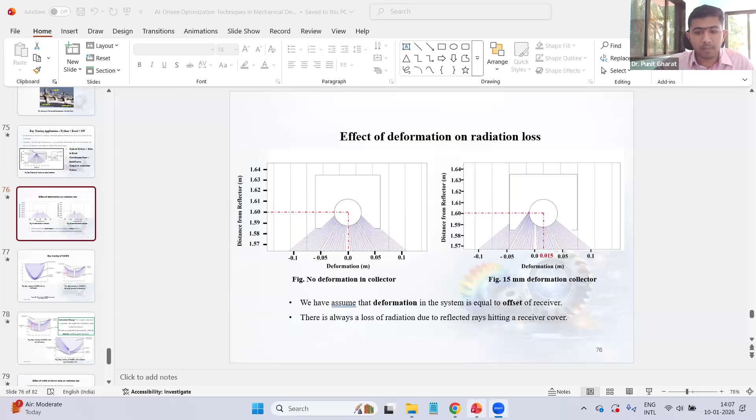Is my screen visible? Yes, sir, visible, but we have to do presentation mode, sir. Yes, sir. Yeah, sure. What is going? Yeah. Now? Perfect, sir. Thank you. Yeah. Just a minute.

Good afternoon, everyone, and welcome to the AICTE ATAL Online 6-Day Faculty Development Program. So I'm going to present on AI-driven optimization techniques in mechanical design.

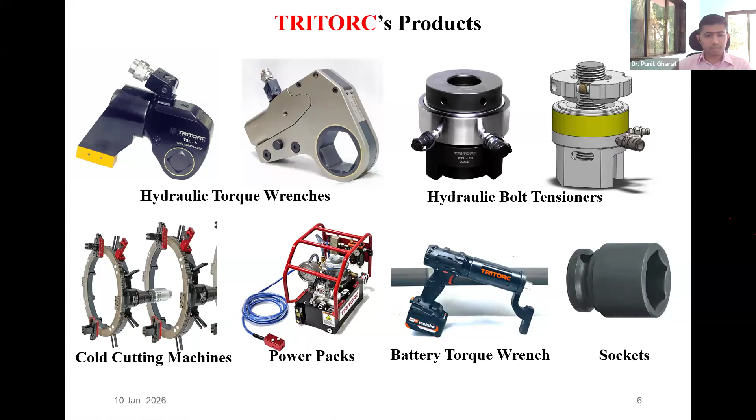So today's agenda will be about the traditional mechanical design processes, how AI currently works for generating CAD from just text. We need to give the prompt and it will automatically generate the CAD model. For that, our prompt must be perfect, because according to our input, it will generate the CAD.

Then we'll see the AI plus CAD tool integration, like SolidWorks plus MecAgent, and there are several tools coming now in the market. Those are not free, but yeah, we'll discuss it.

Then introduction to AI/ML. Though AI is a big body, we'll see the machine learning types and how I used ML in my research project in my PhD.

As we know, the traditional design process starts with requirement collection. Then we do some hand calculations using analytical formulas, whether it is Lewis's equation for the gears or power equals 2 pi N T by 60. That is analytical formulas we've known for years.

Hello. Hello, yes sir, any issue? Somebody said hello, that's why I stopped. Okay, no sir, continue sir.

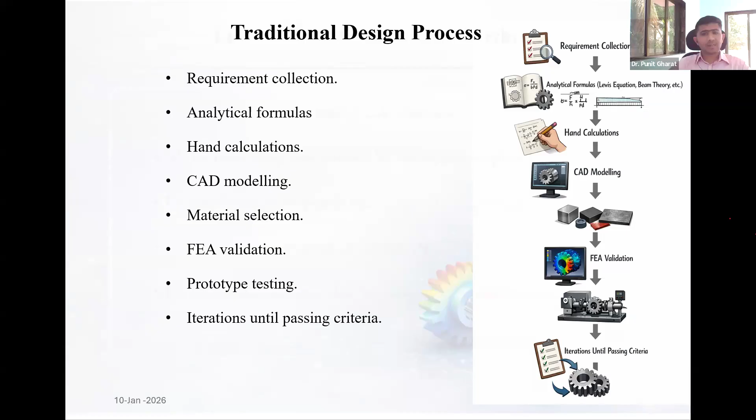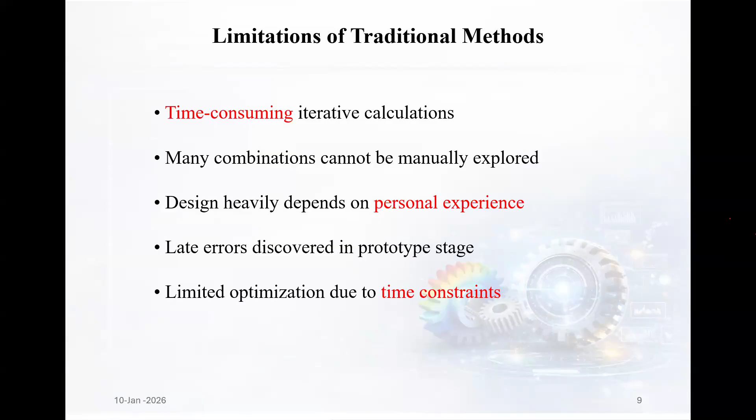So this is the traditional process. Obviously it has some limitations. I intentionally highlighted with red marks, like it is time consuming, and it is based on personal experience. Like if I have 10 years of experience, I can do that in 10 minutes.

But what about the freshers? We need to teach a fresher till they get some idea about it. So with a human mind, we can have only limited combinations for that time. Again, there may be human errors and limitations due to the time constraint.

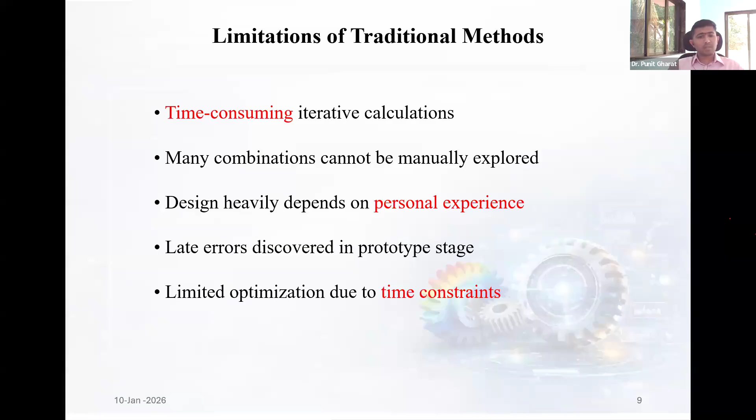In industry, we normally don't get more time, unlike in research where we may have 5 years for one product. In industry, you need results in 1 month. So I'll give you my example, what I've done in my PhD.

So, from traditional design to parametric optimization. You can see the parabolic trough collector. Normally it is made up of a metal structure on which mirror strips are attached.

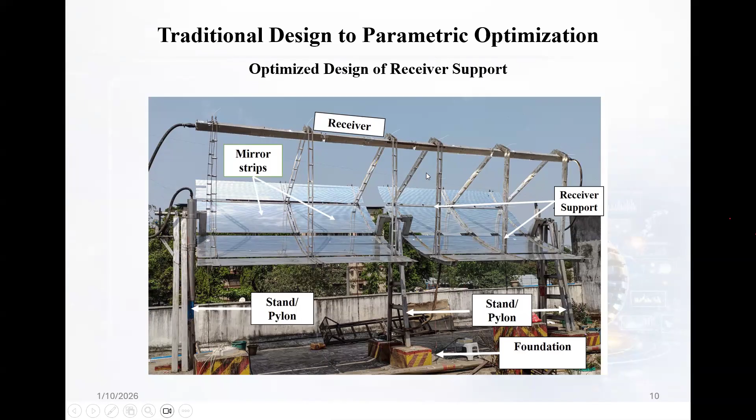Okay, I'll just continue. So whatever incoming solar radiation is incident on the mirror strip gets reflected back and concentrated at the receiver. So whatever is flowing through the receiver, like oil or any liquid, gets heated, and then we can convert it into any other form of energy.

So this was my project. As you can see, it is made up of a whole metal structure, and even the metal structure itself weighs 300 plus kg. Later, we found we can optimize each product, each component.

For this example, I have taken a receiver support. So we searched various literature and found there can be three best possible receiver arrangements. A was the earlier one, B we got from our literature survey, and also C from the literature survey.

But from further analysis, we came to know that B can be the best, as it is at center, so there's no need for two places for fixtures.

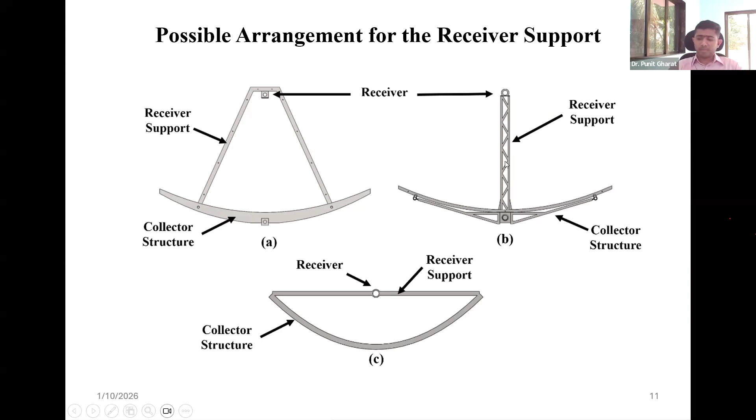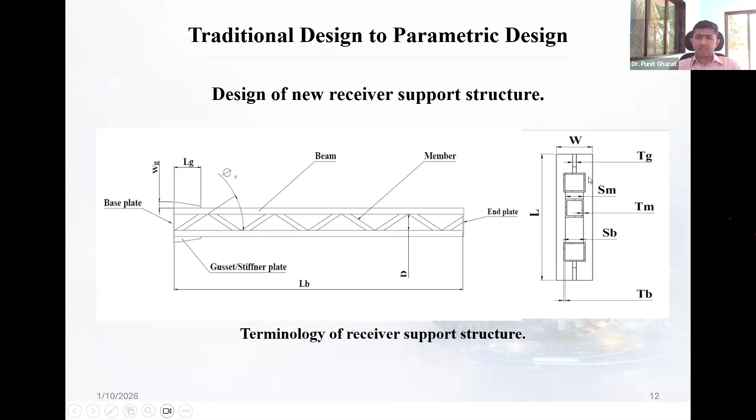So we took this B with a deep study, and then for optimizing that structure, we made some initial sketches with various terminology, like what will be the length, what will be the distance, what is the member size, member thickness, and also searched the market for what kind of members are available.

This is a basic design for every component. Like we normally do the CAD, then in FEA, first step is meshing, then we get results like deformation analysis, stress analysis, and then FOS, and several others depending on your requirement. So it is a basic methodology.

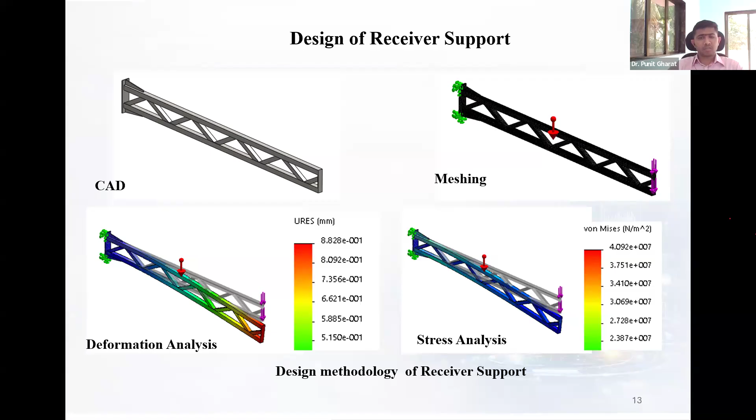There are several beams and members available in the market, like circular pipe, square pipe, L angle, and even C channels. But I have considered around three basic sizes for my analysis.

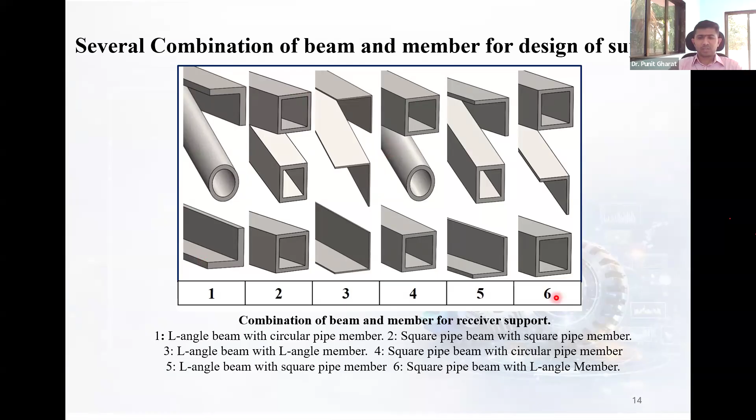We made 6 combinations, and accordingly we got around 812 possible designs. We have beam outer dimensions of 30, 25, 20, because we don't need a smaller one, as it will deflect more, and a larger one will increase the weight. Then there are beam thicknesses like 1.5 to 2.5, 3 mm.

Then there are some assumptions, like if you wanted to do welding, you can't take 1 mm, because in normal welding a 1 mm sheet is not sustainable. Then square pipe, circular pipe, and various others. So we got around 812 designs only for one component, and making that CAD model of 812 models, running the FEA and generating the data is itself a tedious job.

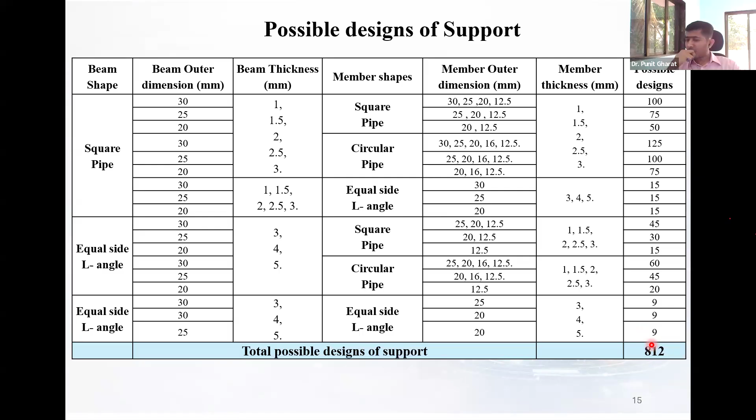So it will take more time. So what we did, we went for parametric analysis. It is a part you can do in SolidWorks simulations. So we gave the beam thickness right from 1 to 3 mm, member thickness 1 to 3 mm, and we generated around 25 scenarios in one analysis. So instead of 812, I hardly did 30 to 35 analyses.

The result came in the form of Excel. Then we analyzed that data, did some multi-criteria decision making, and then finally chose some thickness. And our new design was like that.

In the center, you will get the receiver support. The entire structure is not changed, though you can see the earlier design was different. So for every component, we have done the optimization. Here I am showing just the receiver support as an example.

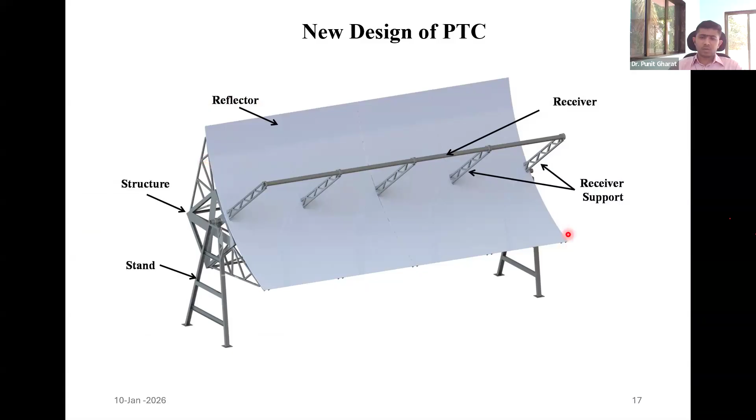So what was the outcome of the analysis? Whether you are using AI or ML, there must be some output. By parametric optimization, what we got was the older design was 17 kg and the newer one was 6.6 kg. So almost 67% reduction in mass. Reduction in mass means reduction in cost.

Then reduction in torque, which was the main factor for my project, because reduction in torque is directly proportional to the tracking system, and it directly affects the gear and the motor required for the tracking of the solar collectors. Overall, the reduction in structural mass was around 16%. So it was an achievement. Instead of 812, I did only 30 to 35 analyses.

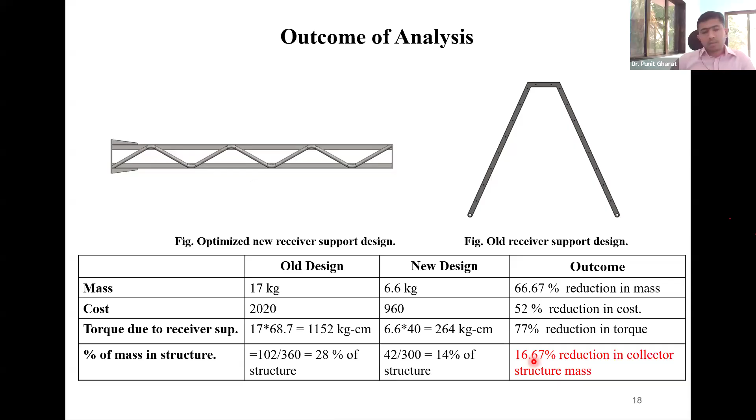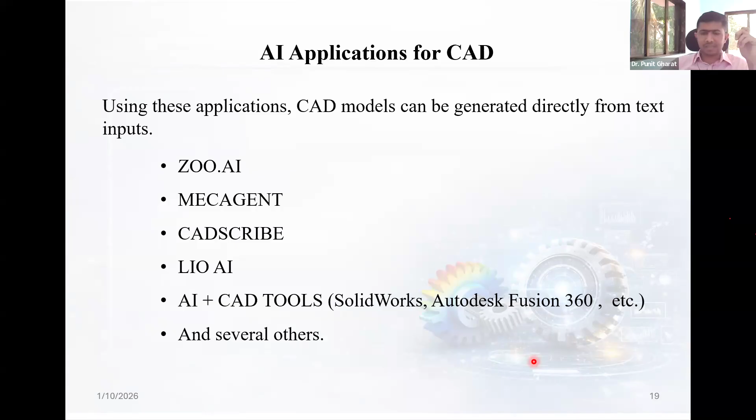So that's what the traditional and AI-based approach is all about. Now we will move towards how AI applications are available in the market for generating CAD or 3D models easily with just a prompt. There are several, like Zoo, MecAgent, CAD Scribe, LIO AI, and we can integrate it with SolidWorks, Autodesk Fusion, or others like Siemens NX.

So here is one example for text to CAD. There is one application called Zoo. You can download it, and it is available for free for some prompts or credits only. So I generated one metal block. You need to give a proper prompt, like: make a metal block of dimension 300 by 200 by 2 mm thickness, all four corners filleted 20 mm, four corners having four holes of 30 mm diameter at a distance.

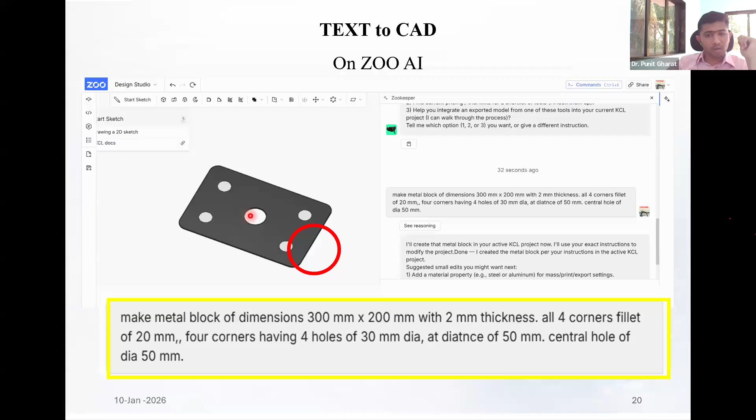Sorry, even my spelling was wrong. It considered a central hole of 50 mm. So you can see the four holes at the corners, the 2 mm plate, and the central hole. Then I wanted to change the thickness, so I gave another prompt: please revise the thickness to 20 mm. Automatically it changed the thickness, though it takes around 2 to 3 minutes.

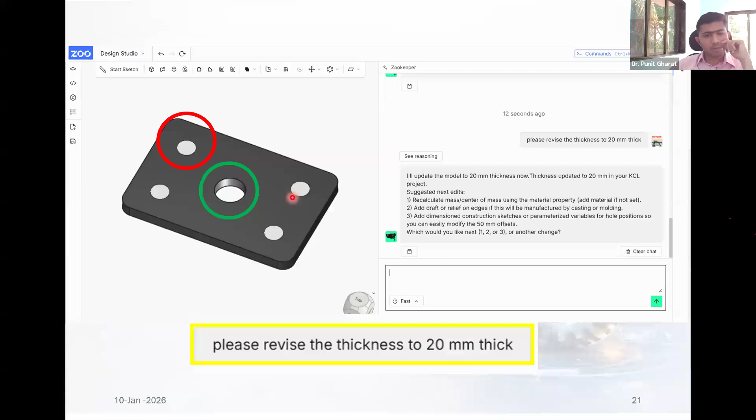It all depends on your internet connection and how complex your geometry is. Here you can see in red, the hole is not properly drilled, it is not through all. So what I did was give another prompt, like: require all four corner holes through all. So here you can see I got whatever I wanted, like a plate with four holes at the corners and one central hole.

This is how you can generate a CAD model without having an expensive CAD application like SolidWorks. In the market, you will get it at 5 lakhs for commercial use, and for institutes it is affordable, or they give a discount, but for industry they don't. So this was the first example.

Are you enjoying or just bored after lunch? You can give me feedback. Yeah, yes, we are enjoying.

So next, I created a spur gear. Like I said, in my product line, we are working on the battery torque range, and one of the important assemblies is the planetary gearbox, where multiple gears are required, and in that we have changed some profile. So I gave the prompt: create a gear with 17 number of teeth, module 1.25.

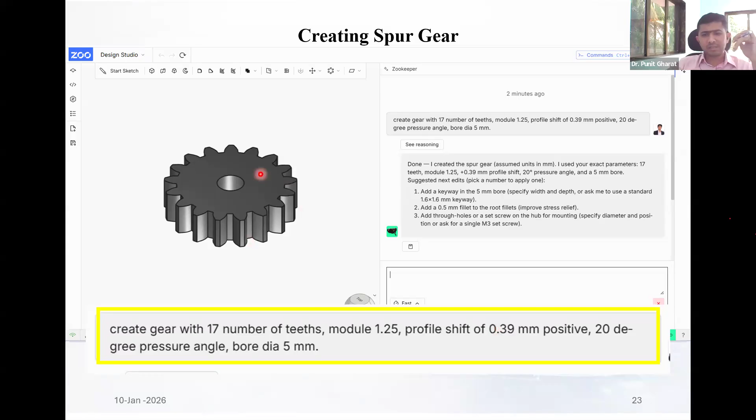Even in the next prompt, I asked for the exact dimensions of all the parameters. Like module is already given, teeth are already given, but what is the PCD? What is the addendum, dedendum? What is the outside diameter, which is very useful while manufacturing.

Making the CAD is easy, but the part must be manufactured easily, otherwise it creates issues from the manufacturing point of view. Then root diameter, bore diameter, which was already given. So this is how we can generate a gear.

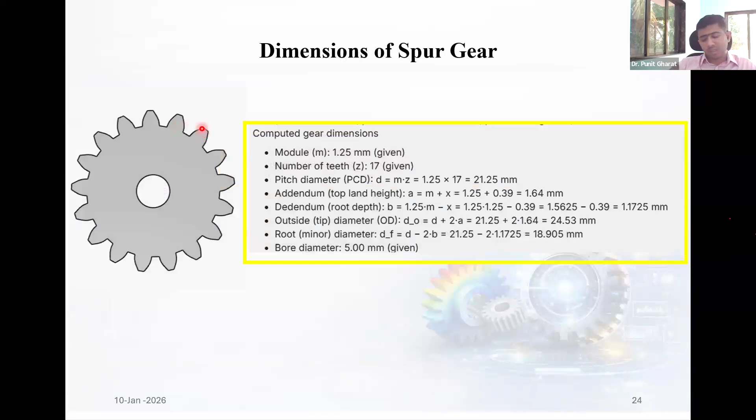There was also another online site available called CAD Scribe. I gave the same prompt there, and you can see the different geometry - how the root was here totally straight, and here quite deep. So I imported the step file and checked it with our existing model.

We had one gear with the same specification, and we had a sketch of it. We merged both, and almost 85 to 90% of the gear was matching right from the profile. This means we don't actually need expensive software for it.

Though for gears, you can also use KISSsoft software, which is 5 to 8 lakhs for commercial use according to the package, but from that we get the exact profile.

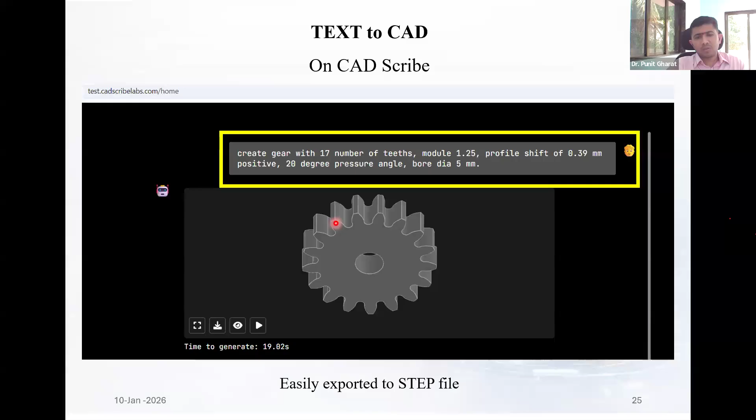Initially, with any AI, we need to work a little bit hard to generate the data or train the AI model. Even using ChatGPT on a fresh computer or fresh login is very different from continuous use, because it has history, and according to that history it makes your next output to your prompt.

So we'll move next to CAD plus AI integration. Earlier we saw text to CAD, but as we use various CAD applications like CATIA, NX and SolidWorks, there is integration available.

Many of you have used SolidWorks plus ANSYS plugin. So the SolidWorks model is directly imported into ANSYS easily without generating a step file separately. So right now, various AI integrations are available in the market which can be integrated into CAD applications easily.

So again, it learns from the previous designs. You need to generate data for any AI or ML applications. Then it helps to optimize the geometry, and it predicts the stresses, weight, performance, and all within a short time. You don't need to...

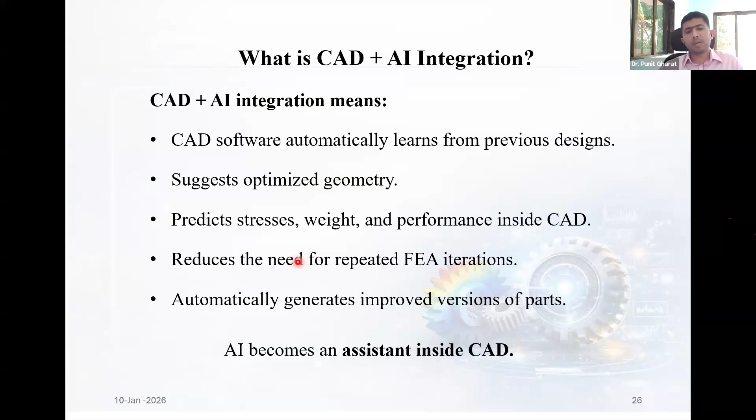So there are several CAD plus AI features available, like Autodesk Fusion plus, SolidWorks plus AI-based design assistance, Siemens NX, PTC Pro - there will be more. If you find some, you can also inform me. Actually, it is evolving now, so day by day new things are coming.

So next we'll see how SolidWorks or any CAD application and AI integration is happening now. There is one tool called MecAgent. You can search it on Google also, and on YouTube hardly 2 to 3 videos are available.

From one of those videos, I have taken a screenshot and I am presenting it because it's completely new in the market and not easily free. It is like Copilot for designers. You need to give the prompt here, and automatically it gets imported in SolidWorks. There was one example, the designing of a scooter, where we wanted to make one fork.

You can see the motor shaft and the wheel shaft. For joining this, we need a fork. So how to make it?

So obviously, what I'll do, you will measure a center distance in SolidWorks. Then you will apply your creative mind, design thinking. You will ask your friends or your teammates.

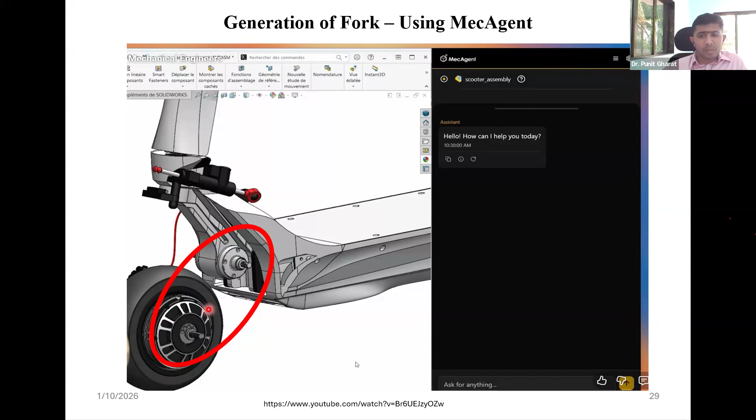So there will be multiple options, but it will be time consuming. So in AI, you just need to give a prompt: generate a fork that connects the wheel to the scooter. And within a minute, it will give the available options.

So price is picked from the market. Even sometimes it gives the reference of the site from which it is referred.

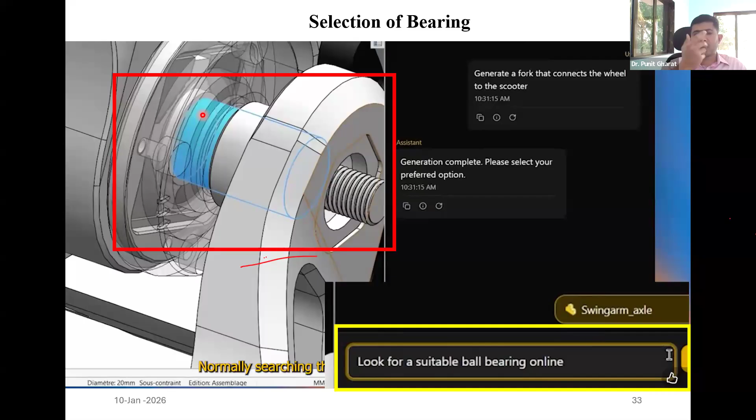Then the next stage was to look for the suitable ball bearing online. So just click the shaft. It will automatically take the inputs like shaft diameter 12mm, and accordingly it will search for the ball bearing and give online parts like from SKF, Schaeffler, or SKF.

In while bearing selection, we need to go to the SKF site, then the product, then the needle bearing or ball bearing or any type of bearing. Then we need to apply filters like what is the ID, what is the OD, which kind of bearing do you need. It will be tedious work.

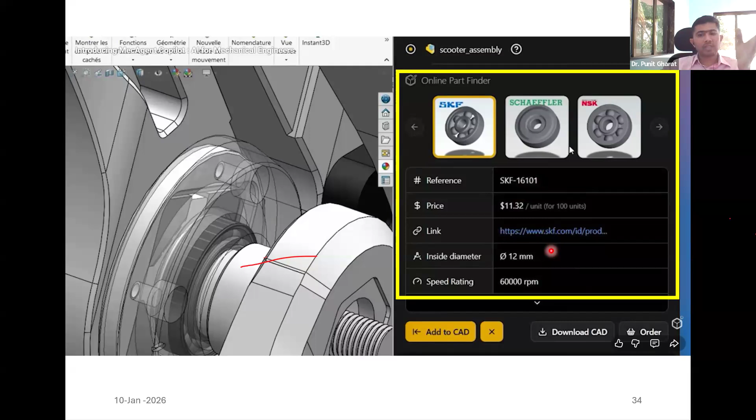Then he made some changes in the wheel. So the prompt was find me a big scooter wheel with 2 grooves on it, meaning it is already marked - earlier the wheel was smooth, so added 2 grooves. Later he wanted to add some zigzag groove.

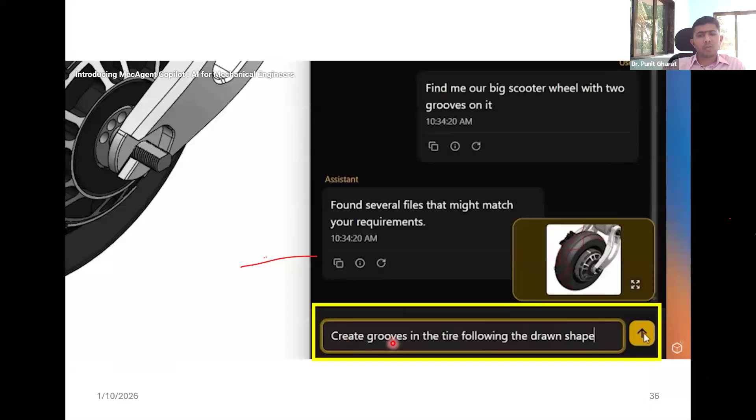So the next prompt was like create a groove in the tire following the drawn shape. Drawn shape means you need to draw this zigzag pattern. Like we can add any zigzag pattern, and AI will absorb that pattern and create the groove accordingly. It means AI is very smart nowadays.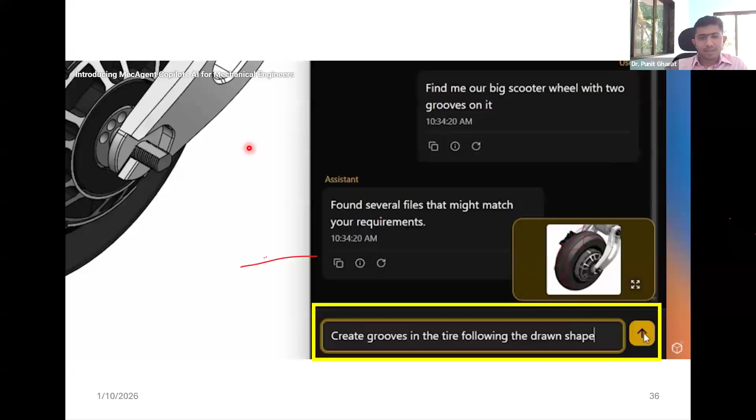So next, within a minute, you will get this. You can see the preview, how it is acting. And after that you can do add to CAD and you will get the entire tire.

So in MecAgent, from those 4 to 5 slides, we generated the fork, then grooves on the wheel, selected the bearing. This is how we can do various things within a short time without much more headache.

So MecAgent is new nowadays. You can go on the MecAgent site, and I'll strongly recommend going on YouTube and seeing the video, because nowadays AI is evolving and various new things are coming.

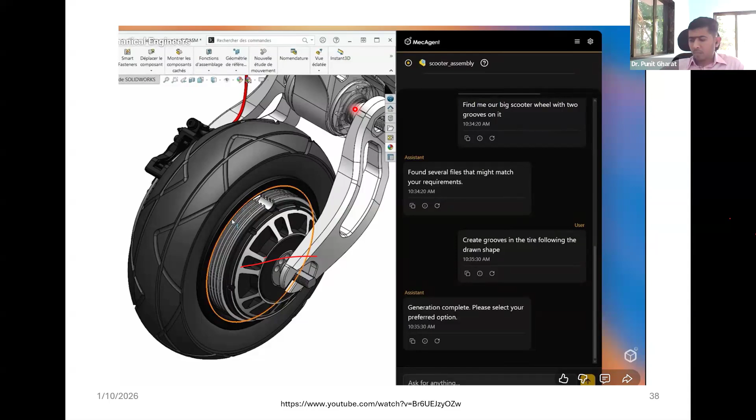So yeah, the benefit will obviously be, as I said, a huge reduction in the design iteration time. And manual mode is very tedious, as we know it's all dependent on your expertise - a fresher will take more time than an expert person.

And also at industry level, this difficulty happens when some experienced person leaves your company, because that experience goes with him, and you don't have anything with you. So you just hire new people and then again training. Instead of training the person, train the ML model that will stay with you forever.

So yeah, it is data driven, which is actually good, and traditional is designer dependent. In traditional, obviously slow iteration, and AI integrated will be fast.

So we have seen the AI for CAD, which is only for 3D modeling and all. Next we'll see how actual AI/ML works for design. In CAD, it's mainly for improving the model or making drafting efficient—faster, automatic feature recognition, reduces modeling tasks, faster concept modeling.

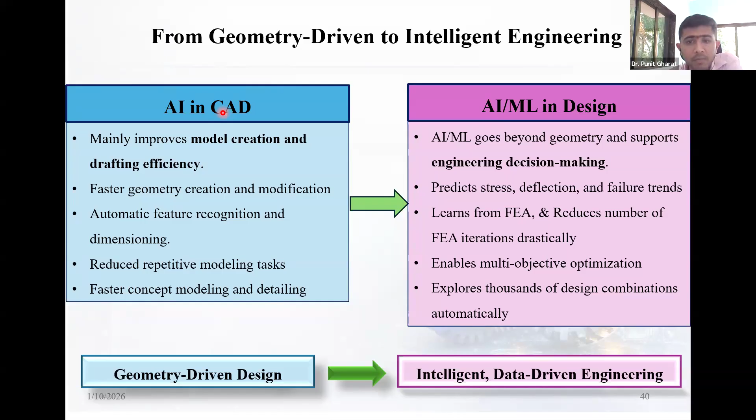So there is one question: do companies really use ML in mechanical design? For MSMEs it's at a very low area, and MNCs are using it nowadays because AI is coming. So not everywhere and not for everything—it is used where many iterations are required, meaning where more time is involved, tedious work, regular work.

When your FEA is very slow, like when making a gear, every time you need to do the Lewis form factor calculations, then bending stress calculations, then selection of width. Instead of that, you can directly use an ML model, and after that just put the value—which model, which number, how many teeth—and you get the desired results.

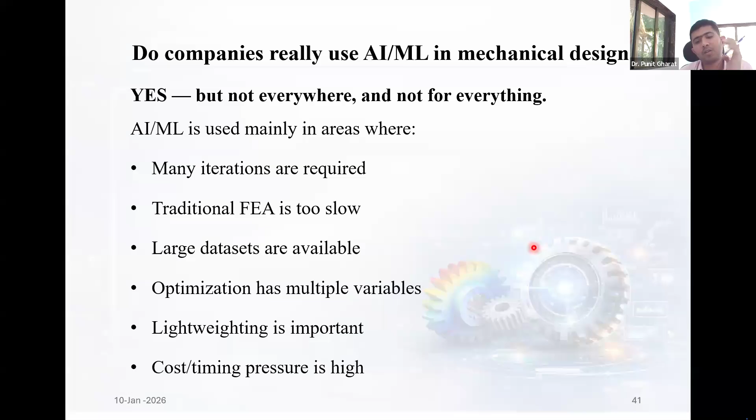Then in AI/ML we have multiple variables available for optimization. AI/ML is very good where price and cost, price and time, is important.

So how does AI transform mechanical design? It automates repetitive calculations, so you don't need to make the same calculation again and again—just put the value and you get the answer. It learns the relationship between parameters. Manually we do extrapolation and interpolation, but here it works on the relationship between parameters, like P directly proportional to T or N, 2 pi T by 60, and so on. This is how it works at the back.

It can predict stresses, deformation, or efficiency easily. For stresses in FEA, like I said earlier, we need to wait to finish the entire FEA—many times your machine fails and half the day is wasted. So once you feed the data into the ML model, it becomes the base for your future work.

It reduces the number of prototypes. In my gearbox design, we made around 3 to 4 prototypes till the final one. In industry, it takes a very long time to make prototypes—around 40 days for one prototype, and design time is different, so around 6 months already pass. So you can actually use this to help.

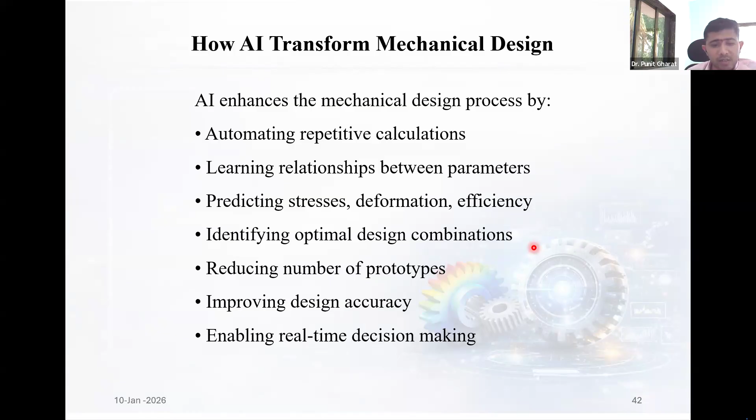It improves your design accuracy and real-time decision making—you don't need to wait. So currently there are many companies, like I said, MNCs or bigger companies like BMW, Audi, and they are using it. Everyone is using it for optimization.

I intentionally marked optimization in red because every company nowadays, whether aerospace, automotive, or manufacturing, is going for optimization—obviously to reduce time and cost, because a company runs on money and is always looking for the highest ROI. For that, you need to make a product at a lower cost.

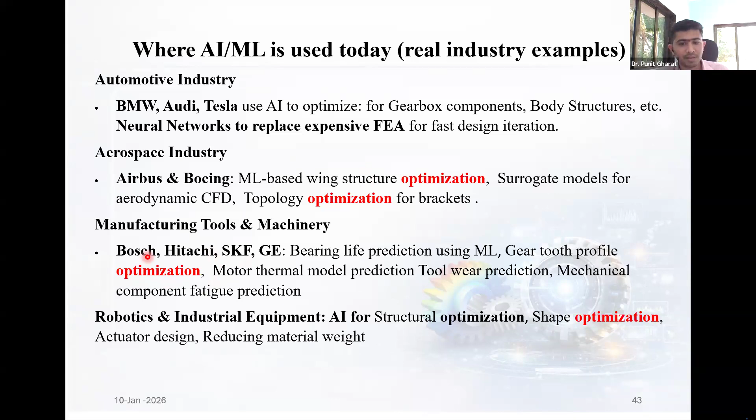Then components—not every component can be easily fed into AI. Simple symmetric components can easily be added; you can add complex components too, but not all. So bearings, frames, beams, gearbox assemblies, and hydraulic components you can add for AI-based optimization.

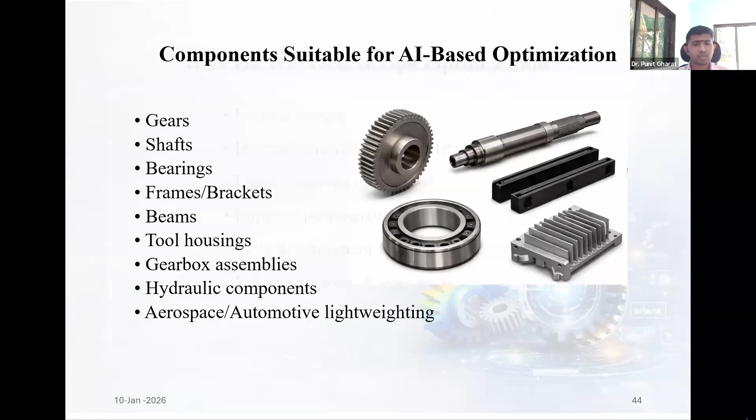Again, as in the previous slide, I highlighted optimization in red. Why is optimization needed? Obviously to reduce weight, increase strength, and lower manufacturing cost, because in various industries there is a department only for reducing cost—a costing department. It works only to reduce manufacturing cost, and design always affects manufacturing cost, because designers often make the model and drawing easily in SolidWorks or other applications, but it's very difficult to make it on a machine. It saves development time, improves performance, and enhances quality.

So what is the workflow for the AI-driven optimization?

Then we need to generate a sample design set, like what we need - maybe stresses, strain, deformation, FOS, etc., or fatigue life cycle. If you go for fatigue analysis, we get the life cycle of the component easily.

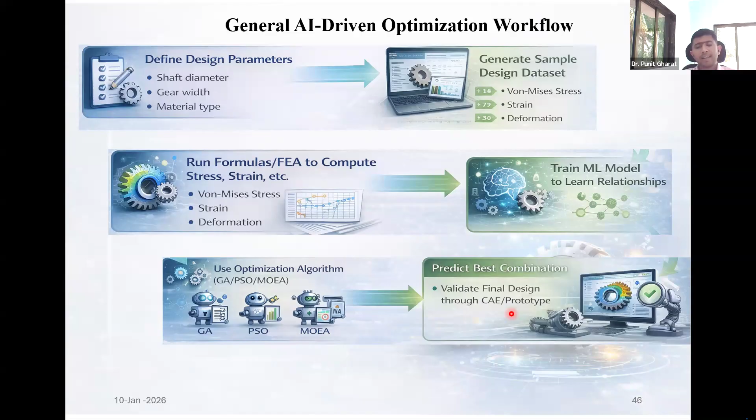So we'll move to the various AI methods or AI/ML methods used in design. But it is not only for design, it is applicable for every sector.

So first is machine learning regression. It can predict the stresses, deformations or strain from your data only. You need to train the ML and you will get it.

And then classification algorithms. A classification algorithm will tell you whether your component or your design is safe or unsafe. You just need to give the condition, like your stress should not be greater than 100 MPa. Whatever is above 100 will go in the unsafe area, and below 100 will be in the safe area.

So then genetic algorithm - it will be used for optimization of weight or for maximum strength. It involves selection, mutation, and crossover - various things like GA, artificial neural network. This was in M.Tech syllabus also for productions.

Obviously in theory. Then neural networks - surrogate models replacing expensive FEA. Here it will again predict the FEA result from past data. A neural network will work like the human mind.

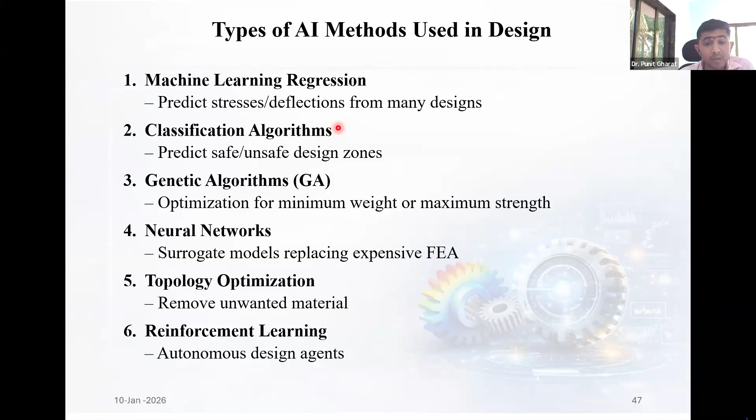So we'll go one by one. This part is quite theoretical, so you can just see what the terms are, and for deeper knowledge you can go and search further.

So in machine learning, it predicts numeric values based on your inputs. Like I said earlier, we need to train an ML model, and for that you need to perform hundreds of simulations. I am talking about simulation because we are talking about design - in design there is FEA, so it can easily predict the stress, deformation, and fatigue life, and it can replace repeated FEA simulations. Various AI/ML tools can be used to replace the FEA simulations.

It can replace the FEA simulation at a later stage, not at the initial stage. Initially, you need to perform the FEA for the 1000 models. Again, I will repeat the same point - you have to train an ML model.

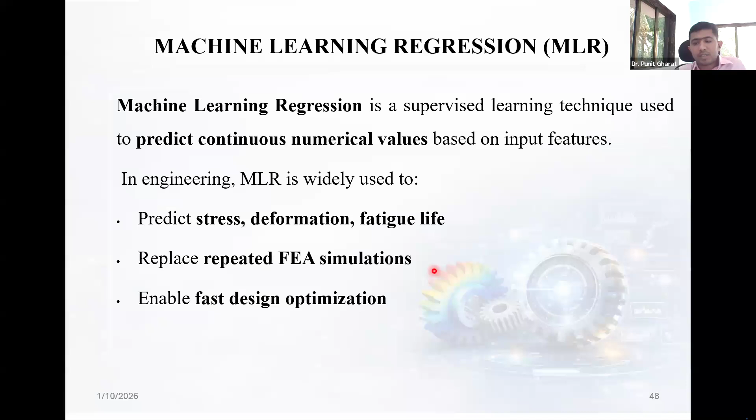Otherwise, it will not get the data, and entire AI/ML is data driven. So it enables fast design optimization, as I said in the earlier slide. This is how the workflow goes: design variable, then FEA simulations, from which we get the stress and deformation data set.

For the X input, we will get the Y output. You will use this data set for training the ML model, then the ML regression model, then optimizations. That is prediction.

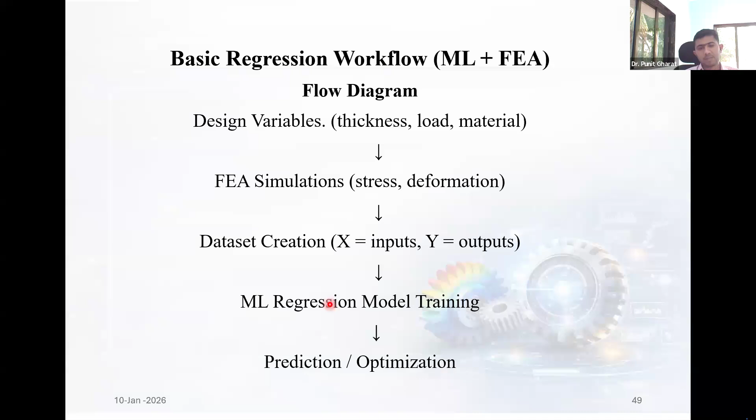So, step-by-step process: FEA data set. Again, you need to run hundreds of simulations by varying thickness and load, and export these stresses and deformation to make a data set table. Then you need to train the AI/ML regression model.

Later, for the new design, like I have done 500 simulations for my cantilever bracket, which is my regular product. Like various companies, you can see they are making only one product. As I'm in the Bhosari MIDC area...

One company is working on one product of Tata Motors or one product of Mahindra. Regularly, thousands of lakhs of products they are making. So for that one product, they can actually use this model.

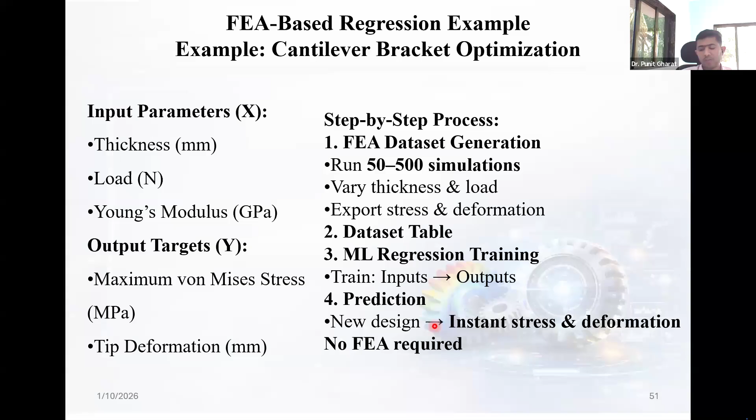So if you train the ML model like that, you will get the new design easily. If you wanted to change the thickness, if you wanted to change the load, no FEA will be required at a later stage. Then we can go for another type called reinforcement learning.

In reinforcement learning, it learns by interacting with the environment. It's kind of like a human getting feedback from the environment, then it adds the feedback, it gets rewards and penalties. If your value is towards your objective, you get positive rewards. If your value is away from your objective, it's a penalty.

It learns by trial and error. The goal is always maximizing the cumulative rewards. Maximizing cumulative rewards means we have to move towards our objective.

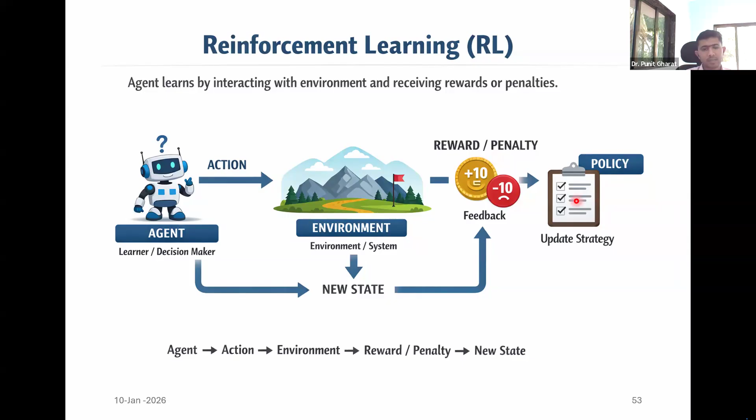This is just an AI generated image. So an agent takes feedback from the environment, and it gets a reward or penalty according to the objective. I have one example for this, and the system will follow a closed loop, accordingly updating the strategy.

In my products, like battery torque wrench using RL, we can say the agent is the torque controller. You can see here the gun, it's kind of a drill machine. You can easily see here where the Tritorc sticker is attached. It has a gearbox and an output shaft, which runs at the desired RPM.

Here you can adjust the torque value, and inside the gun there is a torque controller. What does it control? It controls the torque value by adjusting the speed, angle, or current. As I said earlier, the formula is power equals 2πNT by 60. From the battery, there will be 18 volts continuously, at 5.2 amperes rating.

Accordingly, it will absorb the power, and the controller will decide how much power must be supplied for the desired torque value. So initially, what will be the reward? The reward will be accurate torque and low overshoot, meaning your accuracy must be within a range like plus or minus 5 or plus or minus 3, whatever your desired result is. You get low reward if your torque is over torque, low torque, or there is delay or error.

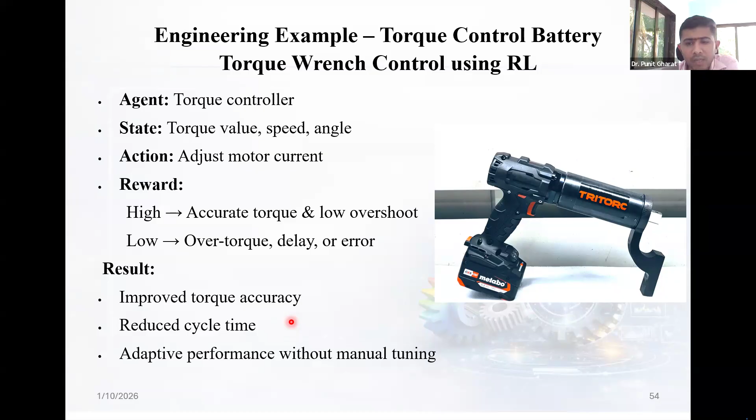So advantages like it works well for the control and optimization, handles complex systems, no need of predefined model. Here we didn't have any controller with us, so we worked on it and we got the results actually.

And again, for every model, whether it is MLR or RL or GA, one disadvantage is always there, one limitation is always there. It is computationally expensive, you need great computational power. When I was in my PhD, there were entire towers, meaning computer towers, in the entire lab for running the CFD, running Python, FE and all.

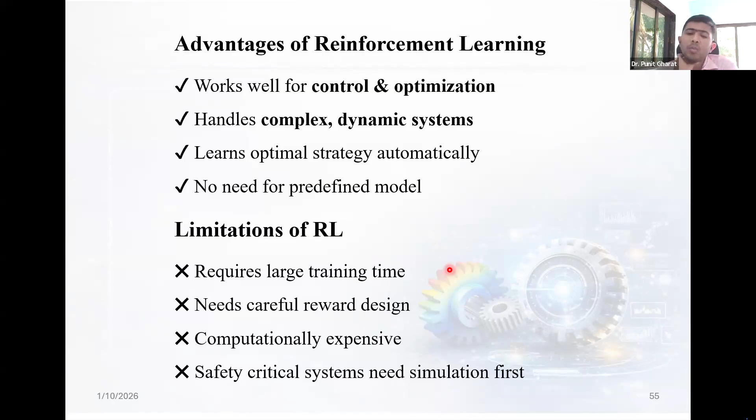So it requires expensive computational power, and it requires large training time. Yes, you need to train your ML model very accurately. If you are training your model in a wrong way, your results will be wrong.

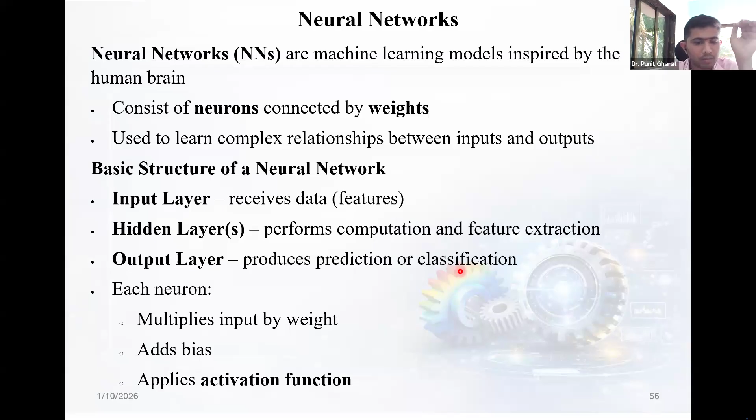Then neural networks. Neural networks are like a human brain. There will be various neurons connected, and there are input layers, hidden layers, output layers. The input layer receives data, the hidden layer performs some computations based on the objective, and then you get the output. Then we can also give weightage for your inputs, add the bias, and the activation functions.

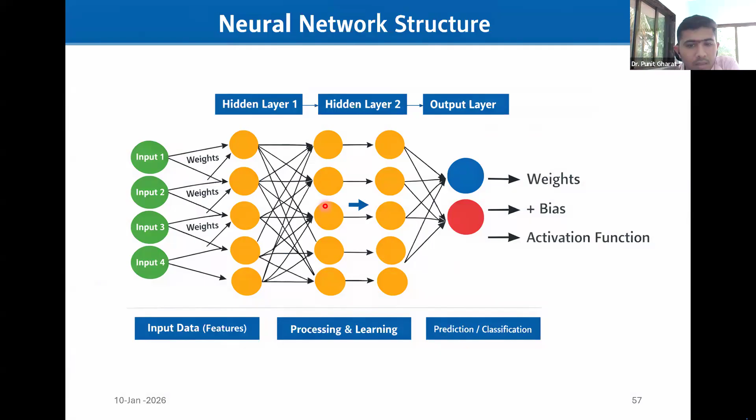You can get the torque estimation without a physical sensor, because we need to validate your output. We have our own calibration, but after the programming in the controller or whatever we are changing in the controller, we validate it on our calibration.

So useful for control and calibration, right, but in every model, whether it is ML or AI or FEA, you need to validate. Even in our battery thermal range, we are validating our controller using a calibration, checking whether our calculations are right or wrong. Many times your calculation gets wrong or gets an error. There are many other factors affecting your products, whether environmental or others also.

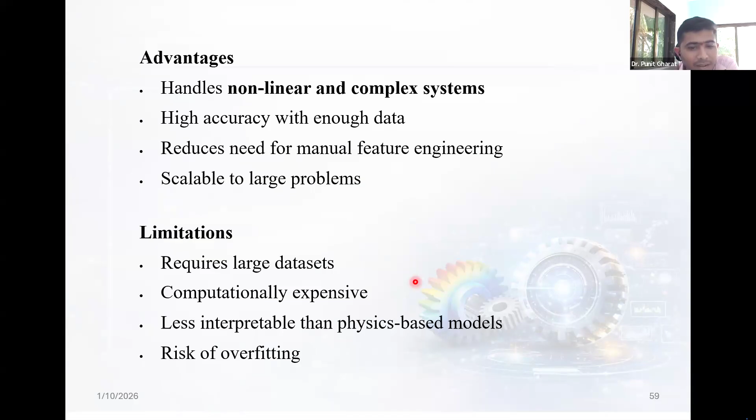Then in ANN, advantages are like they can handle non-linear and complex systems, high accuracy, reduce need of manual engineering, and can be scalable to large problems. Again, here you can see the limitations in every slide: same, computationally expensive, requires large data set, etc.

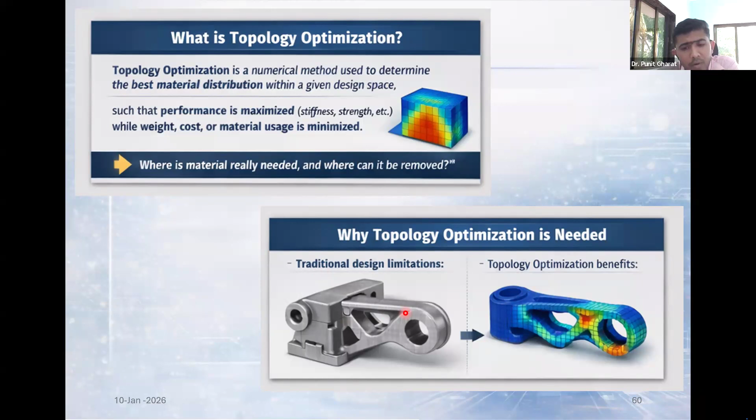So let's consider one cantilever structure. We need to make an optimized structure using topological optimization. In topological optimization, there is always an initial product, and there is one term called generative design where there is no need of an initial model, it will automatically make a product or component. In topology, we need to give the basic inputs like what is the design space, then what is the load, what are the constraints, what are the materials, and what is the objective.

Like you can add the cantilever load here, but you must know the objective, like minimum weight. Then you need to have a FOS around 2, and depending on your application, your FOS will be changed. We normally have 1.5 to 2 FOS at our tools.

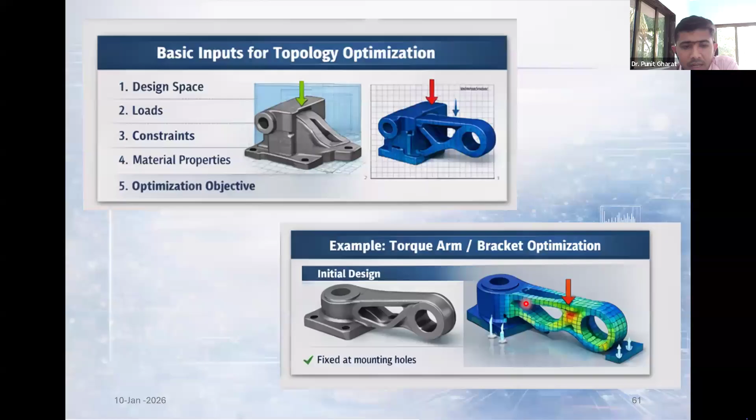So for torque arm or bracket optimization, you can see the initial design is this, and you can get like this, you can fix here. There are various mistakes in the AI generated images also. So you can see material can be removed where it is not needed, and where you see the red, that is higher stress, there needs to be more material, and where it's blue, meaning lower stress, we can have lesser material. Also, you need to give the constraint like what is your member thickness, you can't go below your desired value.

You need to give some values, like a 5 mm thickness, and then minimize the compliance or maximize the stiffness. It will remove material, not exactly 60%, but it will obviously reduce it. These images are for representation only, not exact values. So if your product was 2.5 kg earlier, after optimization you will get around 1 kg, so weight reduction around 60%.

Along with weight reduction, stresses will also increase. Earlier FOS was 2.5, now it is 1.9, and you only need 1.9 or a 1.5 FOS minimum, so it is still safe. You can go for these values.

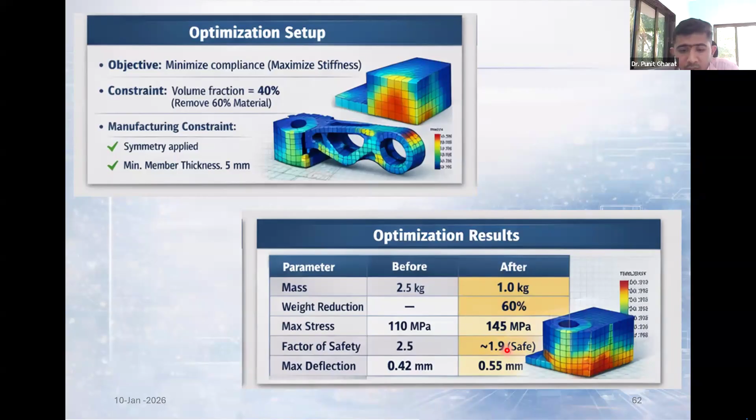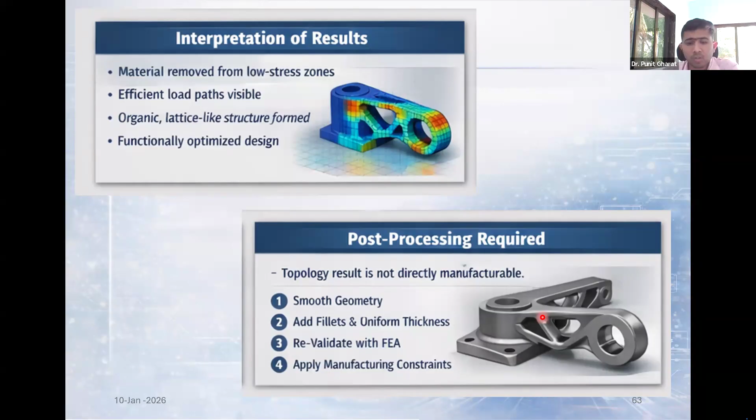In topology optimization, you can't directly use your model, because material is removed in a crude way, not a smooth way. So you need to make every profile correct, add fillet, uniform thickness, and then revalidate with FEA. After topology you get one optimized model, you need to run FEA once or twice, and then check whether it's possible to manufacture it easily.

Now we'll move towards the genetic algorithm. It works on the principle of survival of the fittest, used for optimization, inspired by natural evolution. Like our grandpa, our fathers, us, and our children - nowadays Gen Z is very active or creative but not disciplined. Even if you hire some Gen Z, their mind works very differently than ours. So it is evolutionary.

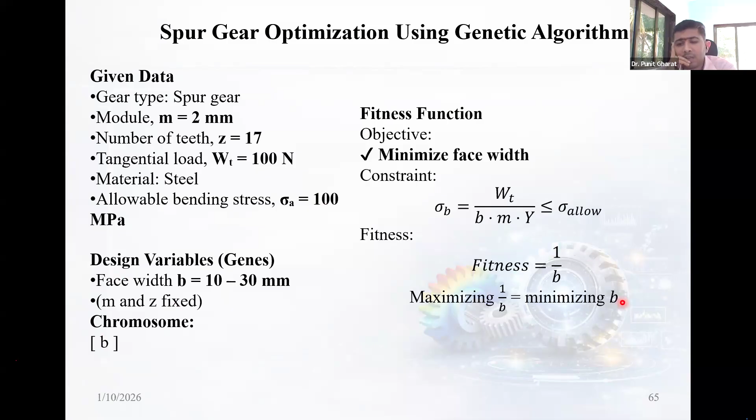Then the chromosome is your B, that is width, and accordingly our fitness value is 1 by B. What is 1 by B? We need to maximize 1 by B, that is minimize B. We can't take any width randomly just because it is safe - we can't over-design it.

So in this entire presentation, you might see I have taken only two examples, like the gear, because it was my running problem. I was working on the gear and I worked on it with AI models and other tools also.

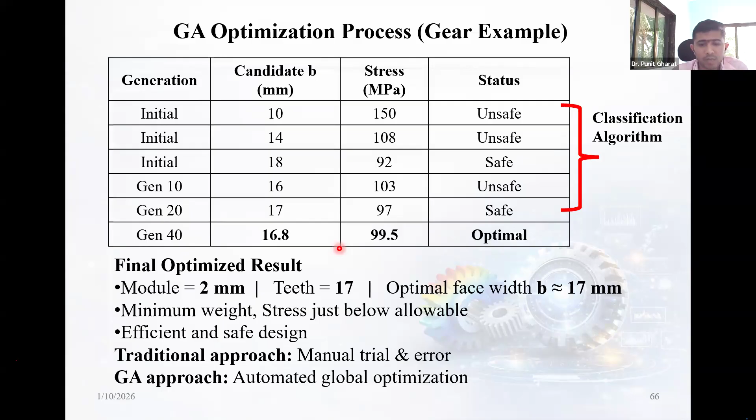So the GA approach is always automated global optimization. A few advantages - it can handle discrete and continuous variables, is easily scalable, suitable for complex mechanical systems. Limitations include being computationally expensive, needing proper tuning like population size, and being quite slower than other gradient methods. I repeatedly say validation with FE is required - you can't directly select the gear just because an AI model gave it to you.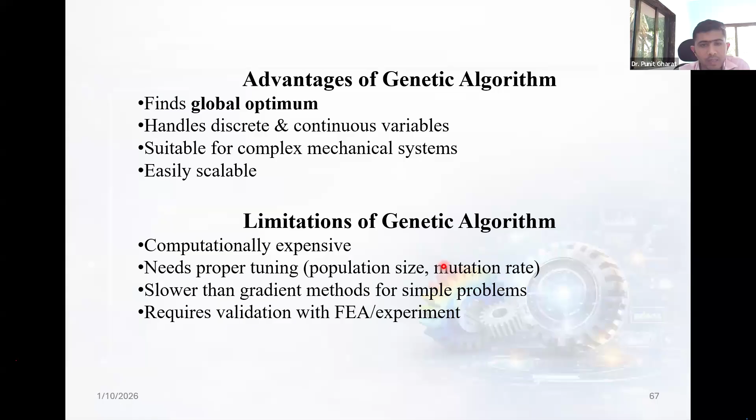So we have covered the theory and a few examples. I hope everybody has understood it very well.

Now what is my observation across industries? Industry is adopting AIML very slowly. Even our team of 12 is not using it at a higher level. Nowadays everybody is using ChatGPT, even for generating images - you can see the background images. That gear with light flashing on it is generated in ChatGPT, or you can use Gemini.

But design-wise, it is adopting very slowly, just because they don't have skilled engineers who know ML. Even I am not an expert in ML, though I can say I'm expert in design. But we need to think about how we can use ML in a broader way for our design.

Quality of data sets is often low. As we are training an ML model, we need high quality data. Nowadays, designers who are really working on ML need time to learn that. Also, in research, it took around 4 to 5 years to work on these research projects. Like we had 2 to 3 guys working on ML in our lab.

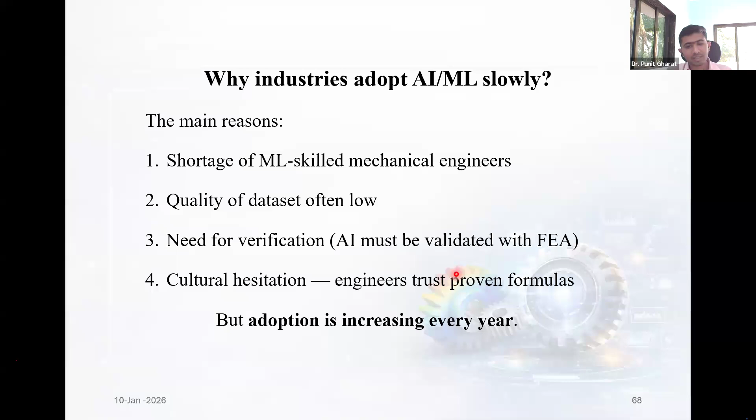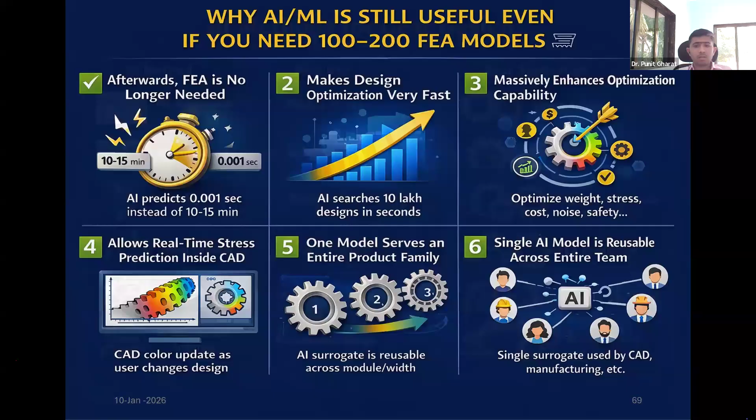The future, as we are talking about AI and ML, has already started, as I've shown you with the CAD plus AI integration model. They're not yet expert in that domain, but agents are trying nowadays to become expert in CAD plus AI integration. For curiosity, I'll suggest everyone go to that site, whether it is Zoo or CAD Scribe, and share your experience. You can share with me on LinkedIn too, whether you really feel that Zoo or Leo AI is useful.

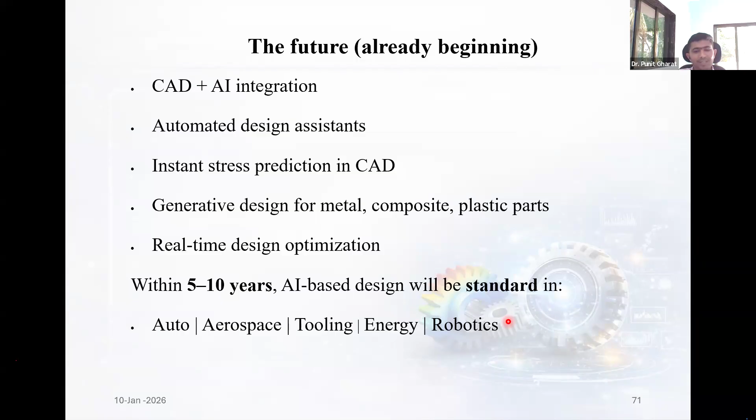Yes, the future of CAD plus AI will have fully autonomous part modeling.

Automatic drawing generation too. Earlier we used to draw by hand, then AutoCAD, where you needed to create all 3 views separately. But in SolidWorks, you don't need to. You just pick the 3D model and you get all the views easily.

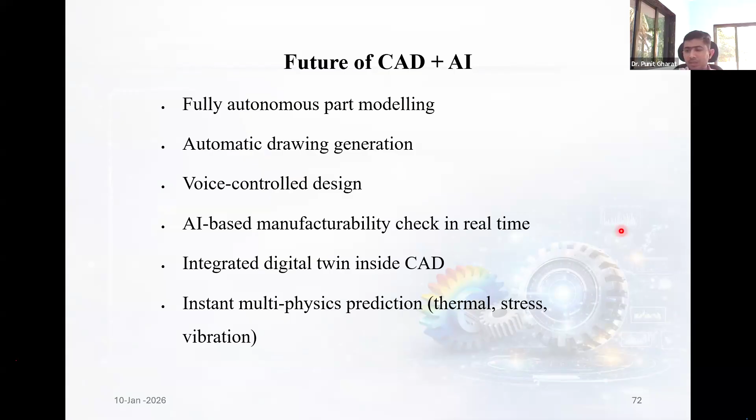Then voice-controlled design and many more features. Time is running, so I'll skip this part. I'll give you an example of how I used AI ML in my research project.

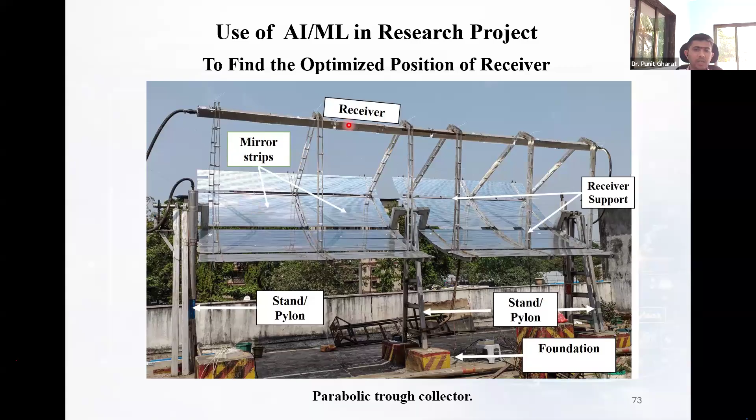Earlier I mentioned the receiver plays an important role because every solar radiation incident on the mirror strip is reflected back to the receiver. So we wanted to know the exact position for optimized efficiency.

In a crude way, we put the PVC strip at different distances, and we found that the strip near 1.6 to 1.61 m got burned in a second. The actual temperature there was 238 degrees.

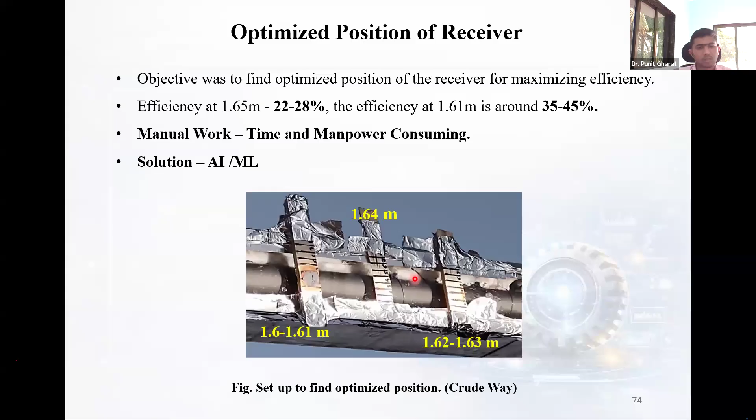Later, our guide Professor Dalvi made an AIML model for this. For that we used SolidWorks, Excel, and Python. The coordinates of the parabolic trough are generated from SolidWorks, then imported into Excel, which is linked to Python.

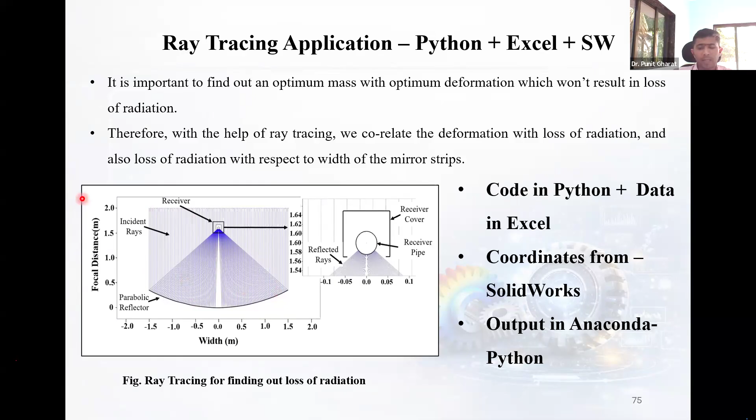You just need to change the number of rays in Python and it automatically gets reflected. For Python we used Anaconda, and you can see the rays here in the bigger picture.

You can also adjust the number of rays. Here you can see not all rays are incident on the circular pipe; some hit the cover. So you can predict the efficiency easily.

What is the loss? There is always deformation, so for that we have taken an offset. When there is a deformation of 15 mm, more rays collide with the outer surface of the receiver.

Accordingly, we did the analysis, and we again used ray tracing for the modified compound parabolic collector. We made two models: a parabolic trough collector and a compound parabolic trough collector. With the modification, you can see all the rays colliding or incident on the receiver.

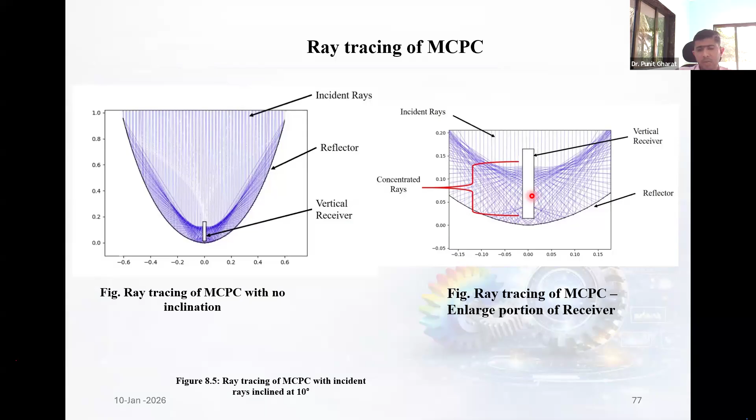But when there is inclination in the structure, what happens? We just change the angle of rays to check whether all rays are incident on the receiver. If we change the inclination, you don't need to change the entire coordinates—just the angle in the Excel file—and within a minute you get the results.

So I was an end user of this ML model, not a creator—my professor was the creator. One model was used across the entire solar group.

That's the advantage of ML: once it's made, it's used by the entire family of designers. Currently the solar team has different students, and they're using it just like this, getting results within a minute.

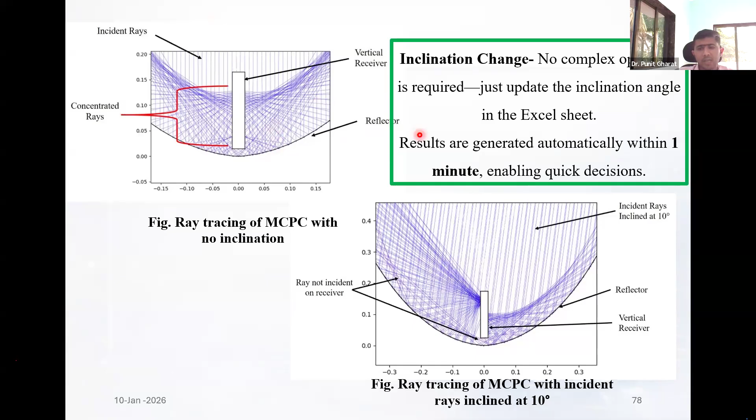Accordingly, we do the optimization and find the mirror strip width, because our entire project was based on the strip-based system, not a parabolic mirror. Our professor already had the patent for mirror strip based parabolic trough collectors.

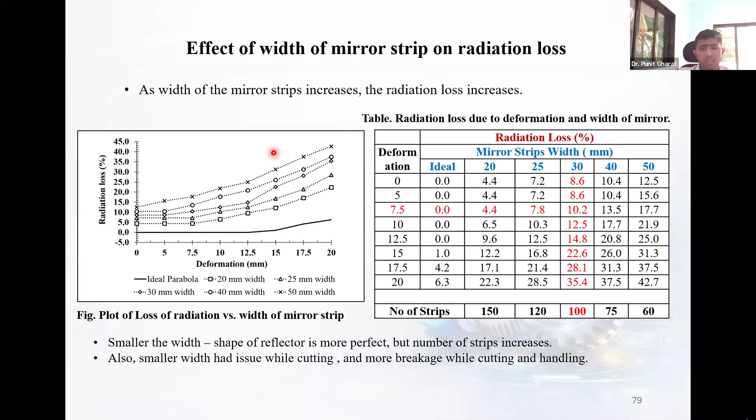So this is how we used an ML model in our research. In summary, AIML is really faster and smarter for design. We just need to do some analysis and generate data, and it can produce thousands of design combinations easily, enabling effective optimization.

It also saves a lot of time, though you need to invest initially—like in business, we say capital investment karo, baad mein profit hai, waise kind of. AI supports engineers in decision making, but doesn't replace them.

We still need engineers to give prompts and train models—you need intelligent engineers for that. Accuracy gets higher if your dataset is great, but extrapolation is risky. I tried one extrapolation method for gears, and it gave some wrong errors too.

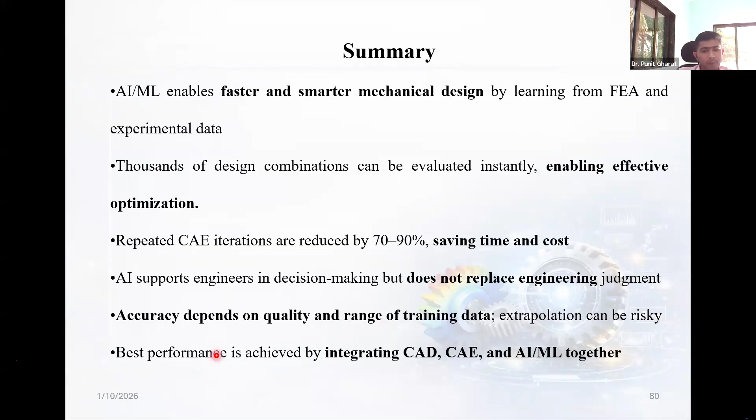Best performance is achieved by integrating CAD, CAE, and AI/ML together. So the final outcome is CAD plus AI equals faster, smarter, and more reliable design. So again, thank you so much for listening and bearing with me for 1.5 hours. If you have any questions, please let me know.